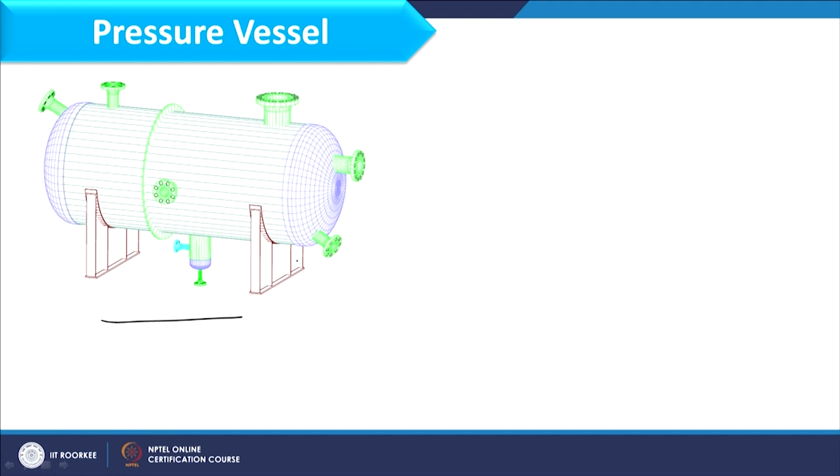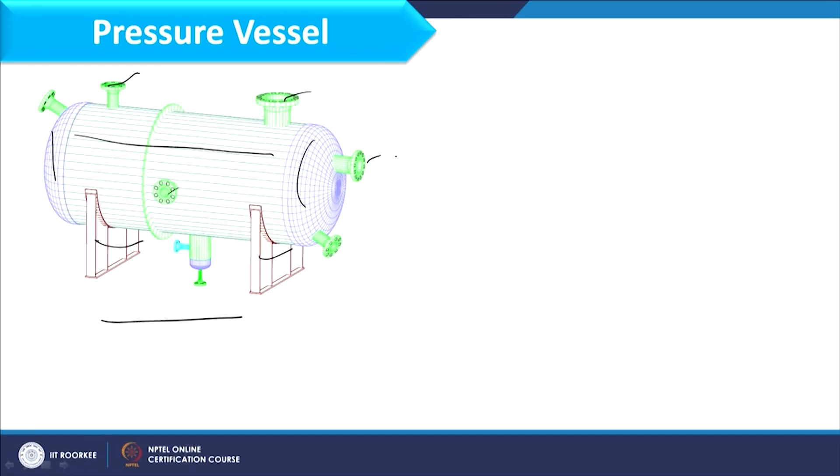Now if you focus on this particular slide, here I am having this pressure vessel which is horizontally placed, and you see this is the shell and these are the heads, and here we have the support and these are inlet outlet nozzles. So it is horizontally placed.

Another schematic I am having is the pressure vessel which is placed vertically, and it has different components which are written over here. So here we will start design from the shell and then we will cover heads and then nozzle, and then compensation, that is related to the opening which is placed in shell as well as head, and then finally we will discuss the support to be placed in this pressure vessel. So here I am having different components.

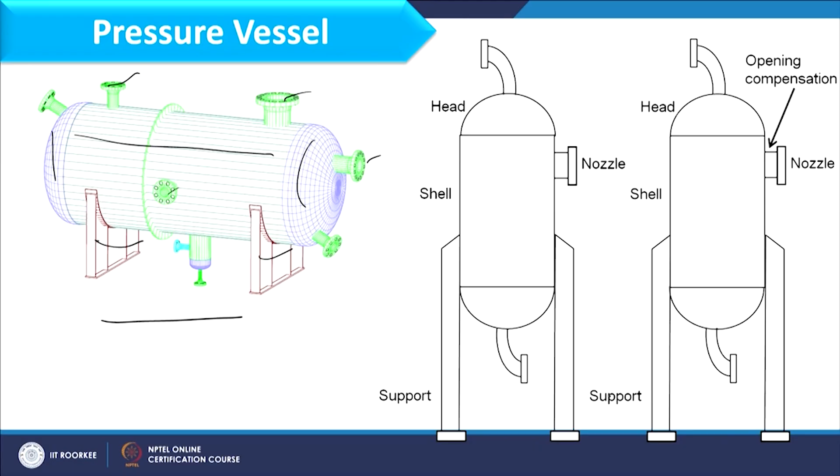So first of all let us start discussion on design of shell, and as far as design of shell is concerned, we will start with design of cylindrical as well as spherical shells. So in most of the practical cases the wall thickness of the process equipment, now you must have the idea that what we are going to compute in designing is the thickness of different components. So here we will speak about design of wall thickness of shell.

So in most of the practical cases wall thickness of the process equipment is not so small that the assumption of uniform stress distribution is justified. Now if you remember the membrane stresses, where we derived expression for computation of thickness for thin vessel, there we considered very small thickness of the metal sheet or of the shell, and that gives the uniform distribution of stress from inner surface to outer surface, because that thickness is very small, and in that case we considered only two stresses, hoop stress as well as longitudinal stress.

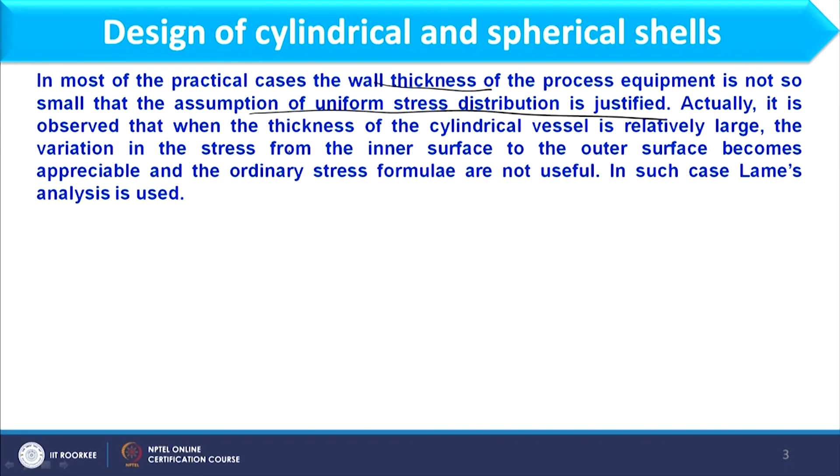However, when I am having thick vessel where thickness is significant, in that case radial stress also matters along with hoop stress as well as longitudinal stress. So when I am having thick walled vessel, whatever expression we have derived for membrane stresses will not be applicable. So to design the thick walled vessel we will use a different analysis, and that analysis is known as Lame's analysis, as it is mentioned over here.

So here I am having the thick walled vessel, where if you consider this is the total thickness of the vessel, and I am considering stress at this point as well as at this point, stress will vary from inner surface to outer surface, and that we need to consider in designing. And the cross sectional image of this cylinder is shown in this figure, where if you see inside this we have the pressure which we call internal pressure. So in this case internal pressure as well as external pressure are both working simultaneously.

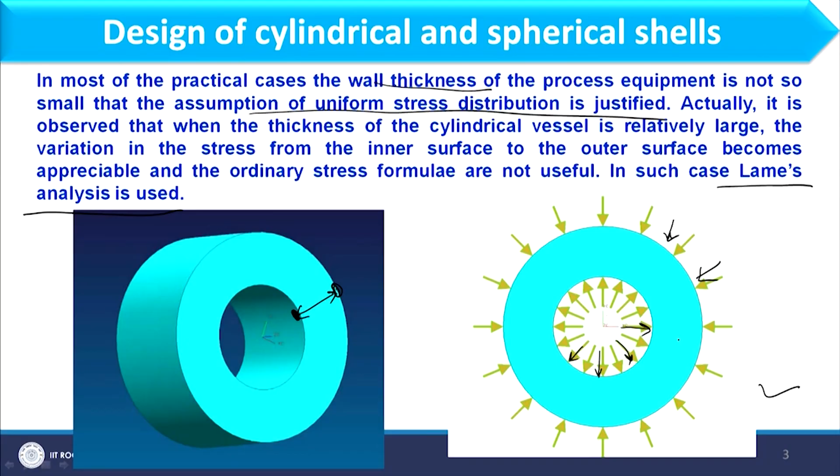As far as derivation is concerned, we will consider the cross sectional image which we have just discussed, and which is also shown over here, where both pressures are acting, internal pressure as well as external pressure. Internal pressure, if you consider in this image, will try to expand this periphery. However, outer pressure or external pressure will try to squeeze this outer periphery. So both pressures are acting, and this condition would be the extreme condition which can ever occur in a pressure vessel design, and therefore we are starting design from this stage only.

Now, to derive the expression for thickness of thick walled vessel, in this image we will consider a small section, and around this small section we will make the balances.

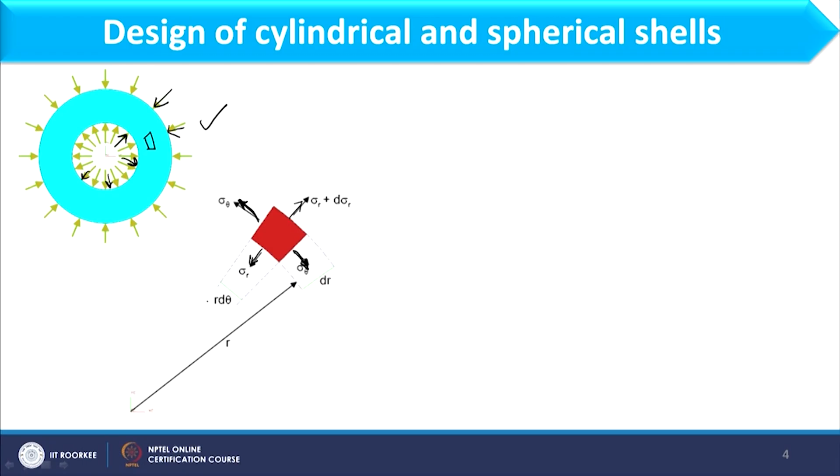So, in this section I have shown over here, if I consider the inner part, the stress is sigma r in the radial direction, and at the outer side we have the stress sigma r plus d sigma r, and this sigma theta as well as this sigma theta will be considered as hoop stress, and this particular section makes an angle with the center, and that will be nothing but d theta.

Okay. And this image we have reproduced over here for better understanding, where sigma r plus d sigma r and all parameters are shown, and here we have the angle del theta, and please consider d instead of del for derivation purposes. So, once I have this d theta, this hoop stress sigma theta is acting in this direction, and when I consider a straight line, this angle must be d theta by 2, and in the similar line the same angle is shown over here.

Now, what happens when I make the force balance? Force in this direction will be balanced by force in this direction. So, in this direction force will be due to sigma r as well as the vertical component of sigma theta, which will also act, as it is shown over here. Let us see, it is sigma theta, so the vertical component of this will be sigma theta sin d theta by 2. Okay. And the same stress will also be applicable in this direction. Okay. So, as far as balancing is concerned, we will consider the force balance.

Now, the force in the upward direction should be sigma r plus d sigma r. If you consider, this is the total stress and this should be the acting area. So, the acting area would be r, because this is the r, okay, and here I have this dr. Okay. So, r plus dr into d theta, that would be this curve, and then L we can consider as unity. So, we have considered 1 as the unit length over here. So, the force over here is sigma r plus d sigma r into r plus dr into d theta into 1.

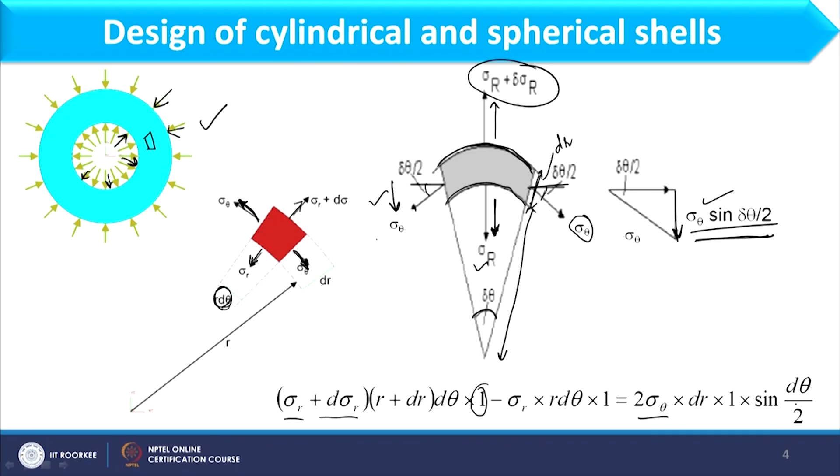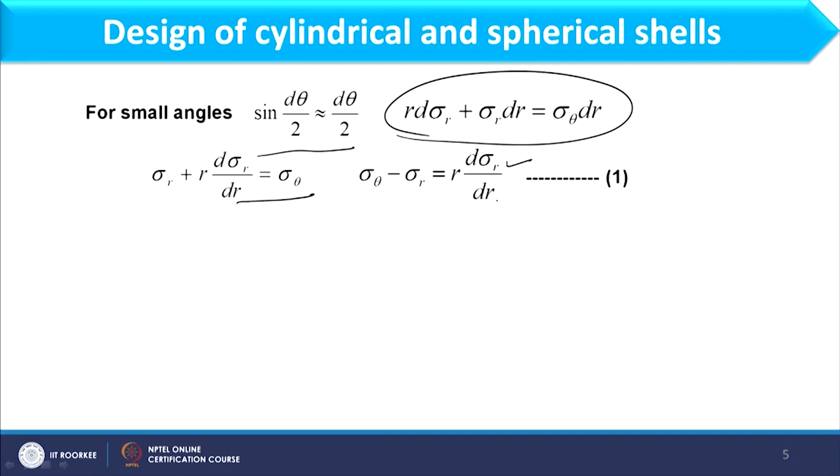For small angles, we can replace sin d theta by 2 with d theta by 2. So, considering this d theta by 2 and resolving the previous equation, we can get r d sigma r plus sigma r dr equal to sigma theta dr. So, this would be the equation after resolving the previous equation. Again we can rearrange this in this form, and then further we can rearrange this as sigma theta minus sigma r equal to r d sigma r by d r. So, that I will consider as equation 1.

Now what happens when I consider stress in the longitudinal direction? That stress would be uniform throughout, because whatever thickness is there in the longitudinal direction, the stress throughout the thickness will be uniform, and therefore because stress is uniform, we can consider strain should also be uniform.

Now if you remember the expression of the triaxial system which we discussed in lecture 2 of week 1, that expression we will use over here to define the stress and strain relationship in this system, and that equation is given as mentioned over here, where epsilon L is equal to 1 by E into sigma L minus mu times sigma r plus sigma theta, and that will be equal to a constant.

Now as we have discussed, the longitudinal stress will be constant, and accordingly the strain in that direction will also be constant. So in this equation if you see, epsilon L is constant, E is constant, sigma L is constant and mu is constant. So the only variable I have is sigma r plus sigma theta. Okay. So further I can rearrange this in this form, sigma r plus sigma theta equal to a constant, and that we can equate to 2a for derivation purposes, and this I have mentioned as equation 2.

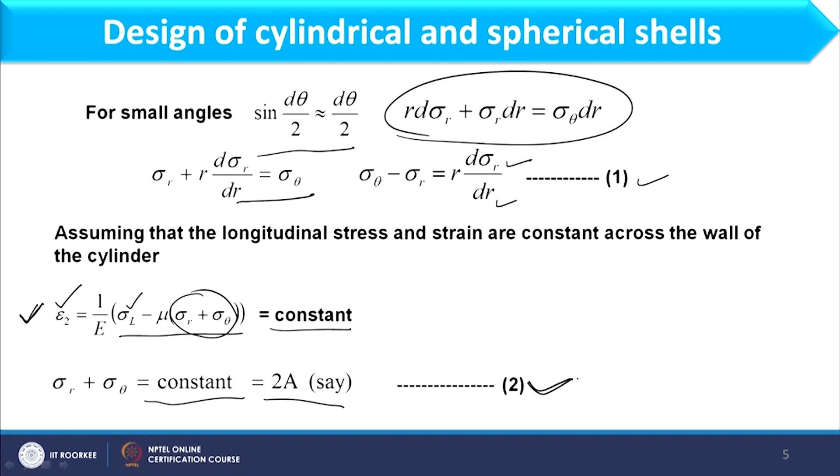So here I am having equation 1 as well as equation 2. Now substituting sigma theta in equation 1, we can remove one of the variables from equation 1 as well as equation 2. After substituting we can have an expression like this, and when we multiply both sides of this equation by r and rearrange, we can have this equation where sigma r and sigma r are added. So 2 sigma r plus r squared d sigma r by dr minus 2 a r equal to 0.

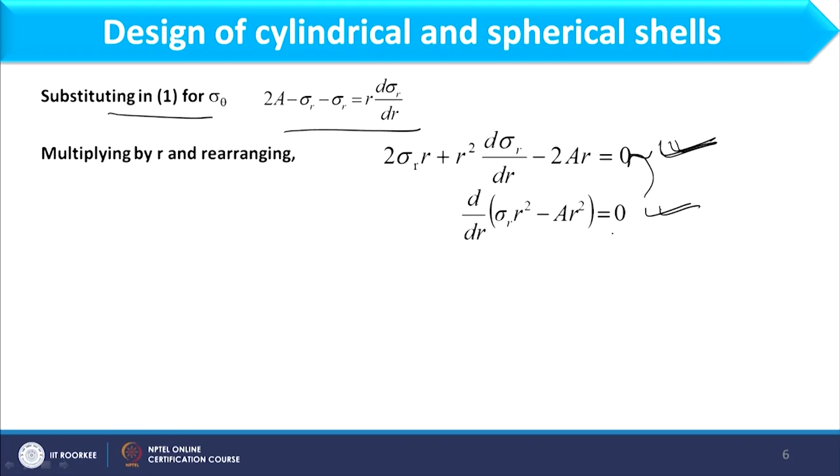Now what does this equation show? Further, if I consider this equation in this form, where d by dr of sigma r square minus a r square should be equal to 0, and if I derive this, I will get this equation. So here I am having the equation in derivative form, and then we will integrate this derivative expression, and we can find that sigma r square minus a r square should be equal to a constant, which I have replaced with minus b for derivation purposes.

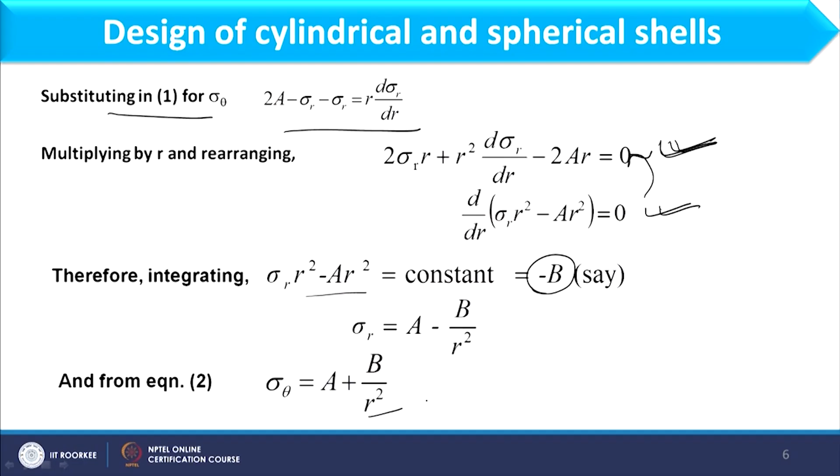So here I am having sigma r, we can extract sigma r from this equation and rewrite it like this, and here I am having another equation for sigma theta, which is equal to a plus b by r square. These two equations are basically called Lame's equations. For further analysis we will use these Lame's equations, and here I am having two constants, a as well as b. Now putting the conditions of the actual system, we can derive the expressions of a as well as b.

Now what would be the conditions? If you consider the cross sectional image of the thick walled vessel where internal and external pressures are both acting, that would be the object for which we need to derive the equation. So we will extract conditions from that image only, where if r equal to ri, sigma r would be minus pi. Now why is it minus pi? Because the direction of sigma r and the pressure are opposite to each other. Further, when r equal to r naught, sigma r will be equal to minus p o, that is the external pressure.

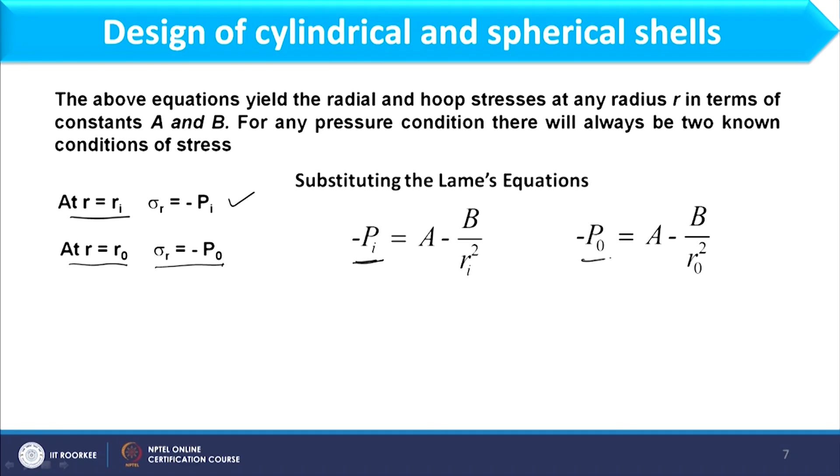So putting these conditions in Lame's equation, we can write the equations for internal pressure as well as external pressure like this, and further we can resolve these equations to find the expressions for b as well as a, as mentioned over here. These a and b expressions I will further use in the equations which we have considered as Lame's equations, and then we will go for the final expressions. So let us do that. Putting a and b in Lame's equation, I can find the expressions for sigma r as well as sigma theta. These two equations we can derive by putting the values of a and b.

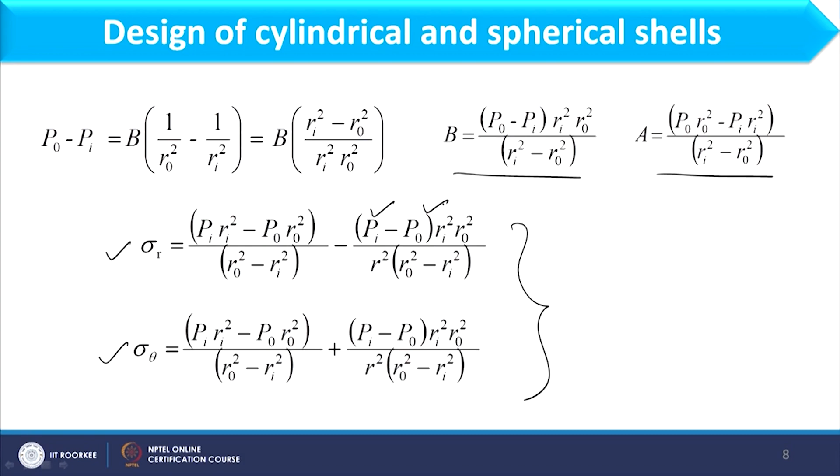Now, if you consider these two equations, both internal as well as external pressures are acting simultaneously. However, when we operate the system, it may be internal pressure operation or external pressure operation, but here we will derive the expressions for the internal pressure condition. So, when I am considering the internal pressure condition, it means the external pressure would be 0. So, in that case Po will be 0, and we put Po equal to 0 in this equation and then further resolve it. Putting Po equal to 0 and Pi equal to P, we can have expressions for sigma r as well as sigma theta.

Now, if I focus on these two, here I have only one pressure, that is internal pressure, and the variable is r in both cases. Now, if you consider the expressions for sigma r as well as sigma theta, which will give the maximum possible value? Obviously, when we compare these two expressions, sigma theta will give the maximum possible value, and that value would be maximum when r is equal to Ri.

I hope you are getting it. Here I have to maximize the stress which can be generated in the system. So, sigma theta would be maximum when r equal to Ri, and that would be the maximum possible stress in the system, and that stress we can replace with the allowable stress value, because at that value we will design the system.

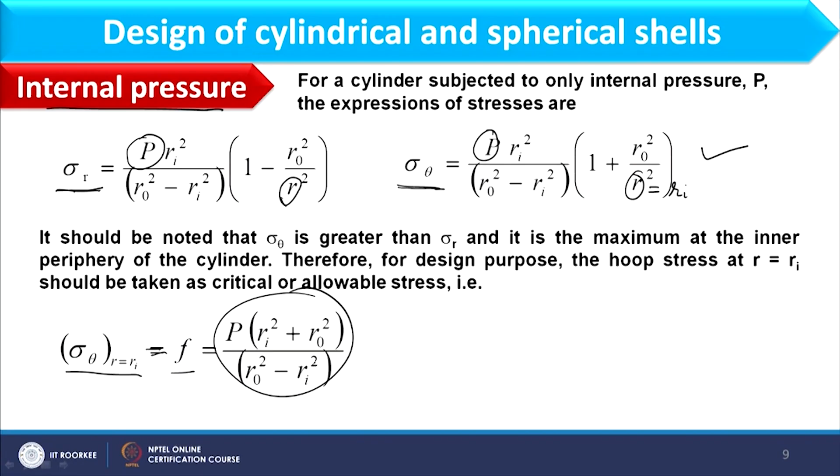So, sigma theta at r equal to Ri, that we can replace with F, and that would be equal to P (Ri square plus Ro square) divided by (Ro square minus Ri square). This expression we have obtained by placing r equal to Ri, and that we can equate to allowable stress. And what is allowable stress? That we have discussed in terminology in lecture 4 of week 1.

And further, in the terminology lecture, we discussed another term, which is the weld joint efficiency factor. When we make any welding joint in a metal sheet, the strength of that joint will be weaker in comparison to the regular sheet. Therefore, the allowable stress that we have considered for regular material must be multiplied by the J factor to get the actual stress.

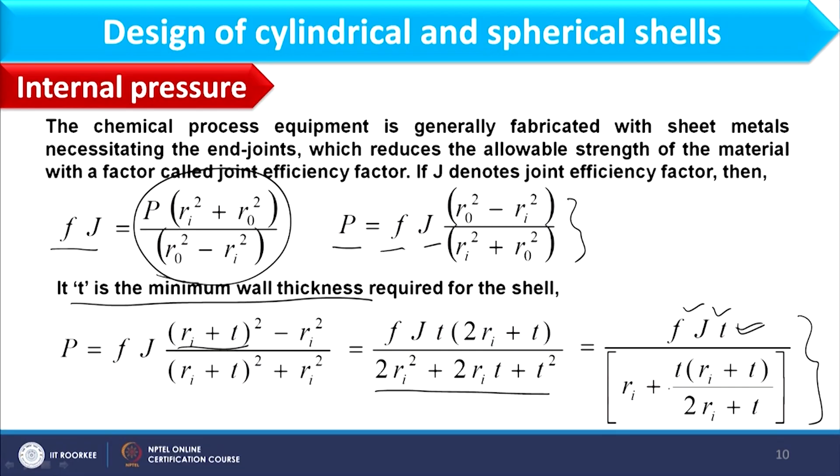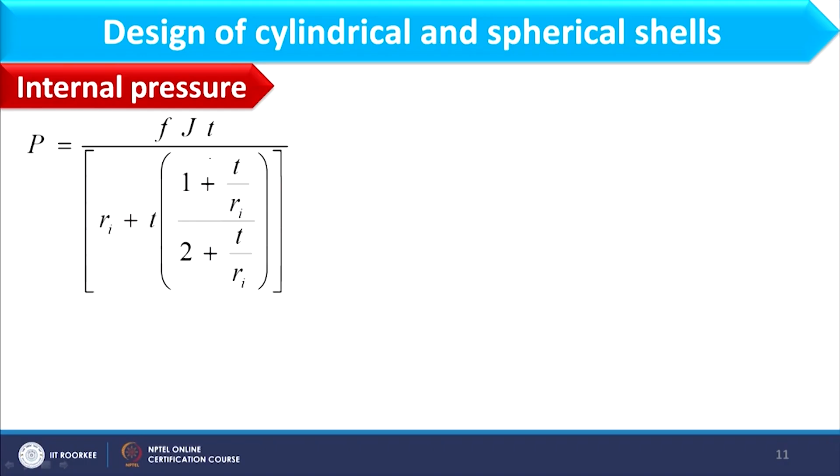So, if I consider t is the minimum wall thickness required for the shell, Ro we can replace with Ri plus t, and the whole expression we can rewrite and rearrange, and then further resolving it we get an equation where P is defined in terms of F, J, t and radius. So, P will be equal to FJt divided by this whole expression. This would be the basic equation for design of shell when internal pressure is acting, and this equation is also used as a basic equation in the code, which is IS 2825.

Further representing this equation in terms of diameter instead of radius, we can have an equation like this, where P in terms of diameter is shown. Now, as we have discussed, this equation will be used as a base for design of shell when internal pressure is acting. So, here we will apply the limitation of IS 2825, and if you remember, there is the limitation where do by di should be less than or equal to 1.5.

So, this is the expression for do by di less than 1.5. After resolving this, we can have the expression of t by di equal to 0.25. How has this 0.25 come? Because this do we have replaced with di plus 2t, and after resolving it we get t by di as 0.25. Now, what happens when we put this t by di as 0.25, this whole expression will become 1.2, and that would be the maximum possible value.

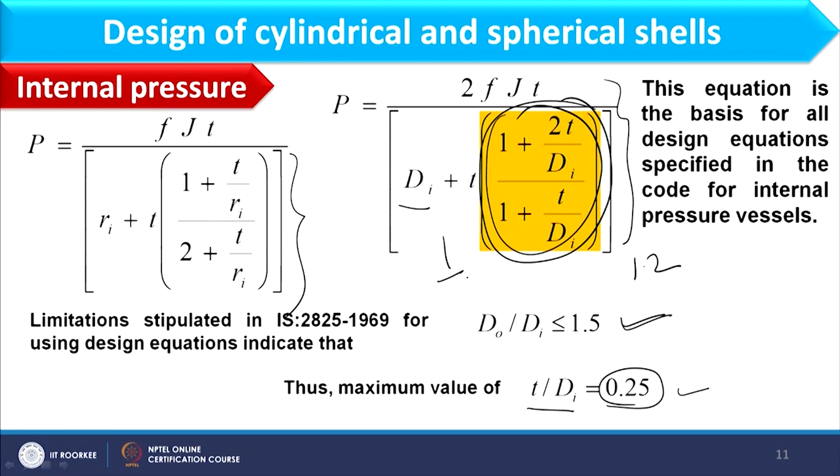If I am considering the minimum value of t by di, that value would be 0, and if I put 0 over here, the whole expression will give the value as 1. So, this whole expression varies from 1 to 1.2. For derivation purposes, we have considered this expression as 1, because 0.25 would be the maximum possible value which should not exceed. Therefore, instead of 1.2, we have taken the value of this expression as 1.

So, this would be the final equation for pressure, where P is the internal pressure and P equals 2FJt divided by (do minus t), because here the whole expression I have replaced with 1. From this we can extract the term t, which is the minimum thickness, that should be equal to P di divided by (2FJ minus P), and further it can be written as P do divided by (2FJ plus P). So, when I am considering outer diameter, I have to take plus over here. When I am considering inner diameter, I need to take minus over here.

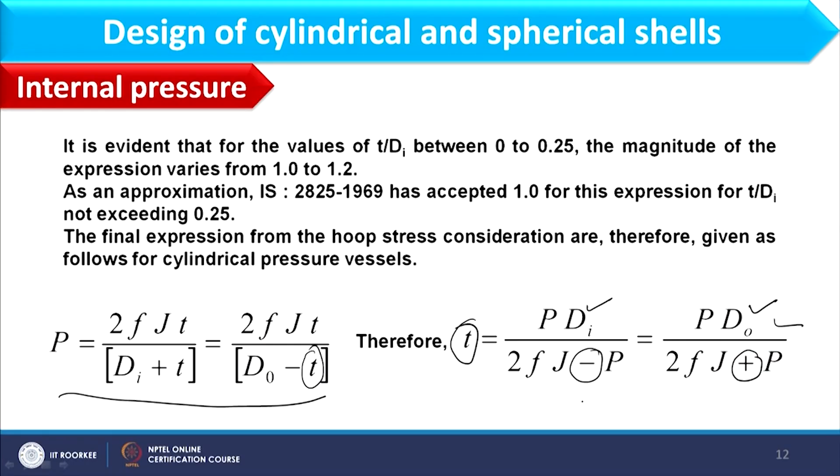So, this expression is basically the minimum thickness of the vessel. Why am I calling this a minimum thickness? Because at least this thickness should be provided to withstand the pressure P. Therefore, it is called minimum thickness.

So, here I have the expression for internal pressure in a cylindrical shell, and as per IS 2825 1969, the expression given is P is equal to 200 FJT divided by D naught minus T. If I need to extract T from here, the expression should be T equals P D naught divided by 200 FJ plus P.

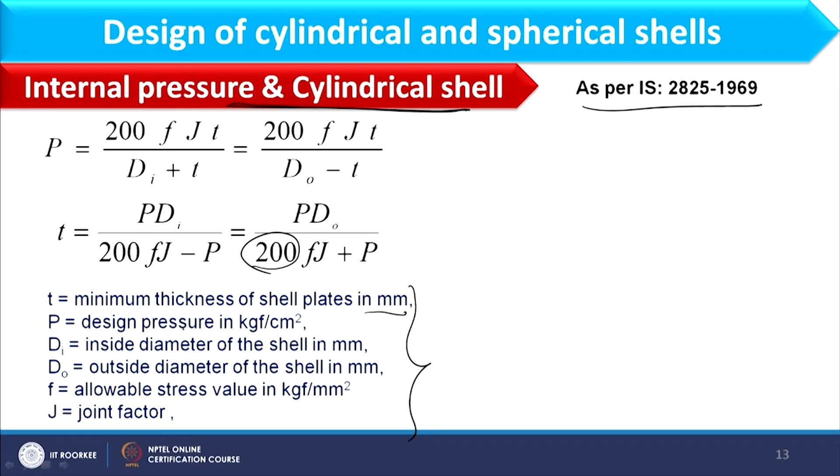Now, how has this 200 come? When you see the nomenclature, here T is in mm and P is the design pressure in kg force per centimeter square, and allowable stress, that is the F value, is given in kg force per mm square. Due to this difference in units, we have this 200 factor, and J is the joint efficiency factor, which we discussed in lecture 4. So, these expressions are given in IS 2825 1969.

However, in books you can find the expression 2 Fj instead of 200 Fj, because their pressure as well as allowable stress are both shown in the same unit, that is Newton per meter square, and thickness we can compute in meters. So, due to this difference in units, we can have different expressions in code and in books, and the difference is only in the factor, where in the code 200 is available and in books 2 is available.

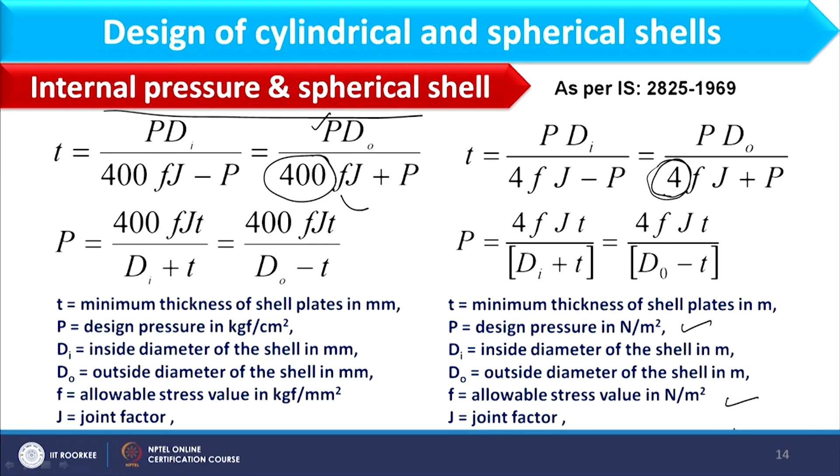And we have already discussed that this T is the minimum possible thickness which should be provided to withstand pressure P. That thickness is the minimum possible thickness that will be maintained throughout the operation of the vessel. Now, if you remember the terminology lecture, which is lecture 4 of week 1, there we discussed another parameter which is corrosion allowance. Corrosion allowance is used because there are many ways through which deposition occurs or material is extracted from the metal sheet, and all that wastage occurs. So, to account for that we will have corrosion allowance.

So, that corrosion allowance will be added to the minimum possible thickness, because as time passes only that layer, the thickness which we have provided as corrosion allowance, would be affected. The rest of the thickness will remain as it is to carry out the process in a regular manner. So, minimum thickness plus corrosion allowance we will add to get the thickness of the vessel.

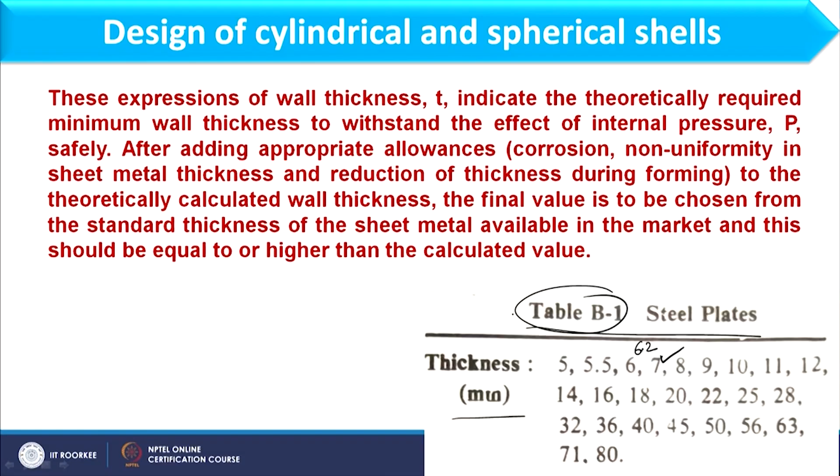Now, what happens after that? There are sheets available in the market which have standard thickness. So, whatever thickness is available above T plus corrosion allowance, that we will consider as the standard thickness, and you can see that value from table B1, which gives standard thickness of steel plates. So, let us say I have the value 6.2 for minimum thickness plus corrosion allowance. I will consider 7 as the standard thickness. This table B1 is available in the book by BC Bhattacharya, and you can refer to appendix B in that book. So, in that way we will calculate.

Now, in this slide we will discuss internal pressure failure. How that internal pressure failure will occur can be understood as the vessel failing after stresses in part or a large portion exceed the material strength. Whatever stresses are generated, if they exceed the strength of the material, then failure will occur.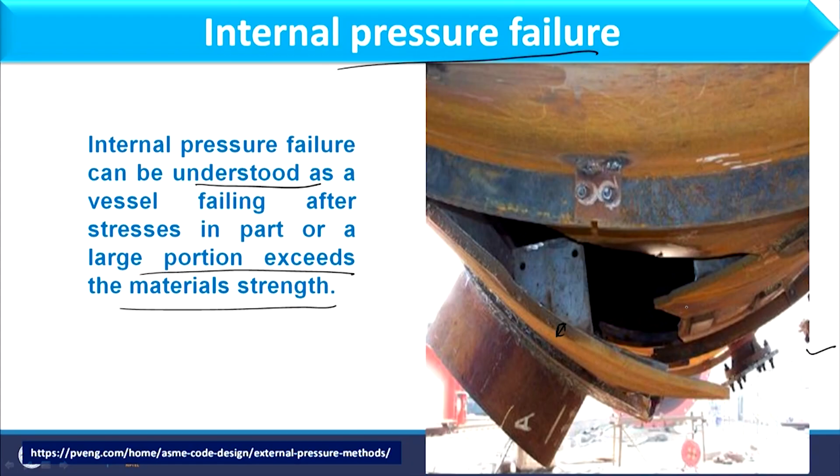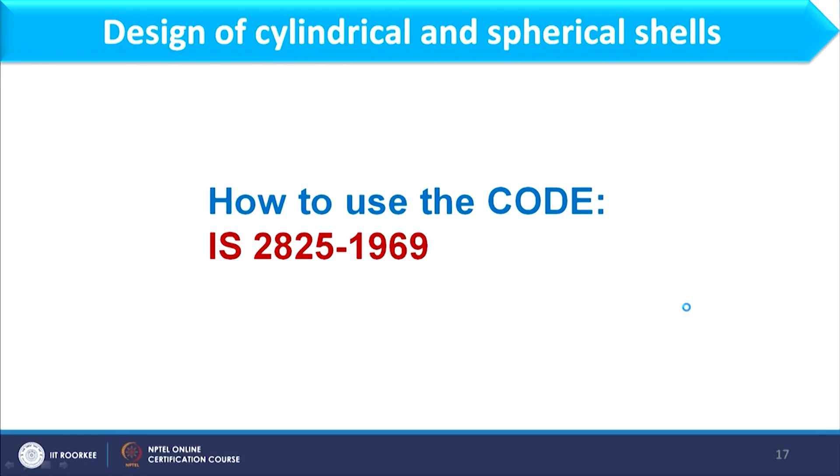Now, till now we have derived the expression for thickness of cylindrical as well as spherical pressure vessel, and considering that we will solve a few examples. But before that I want to demonstrate how code IS 2825/1969 will be used, and I assume that this code will not be available to you. So, that code I will provide to you so that you can use it. But now we will discuss how it should be used.

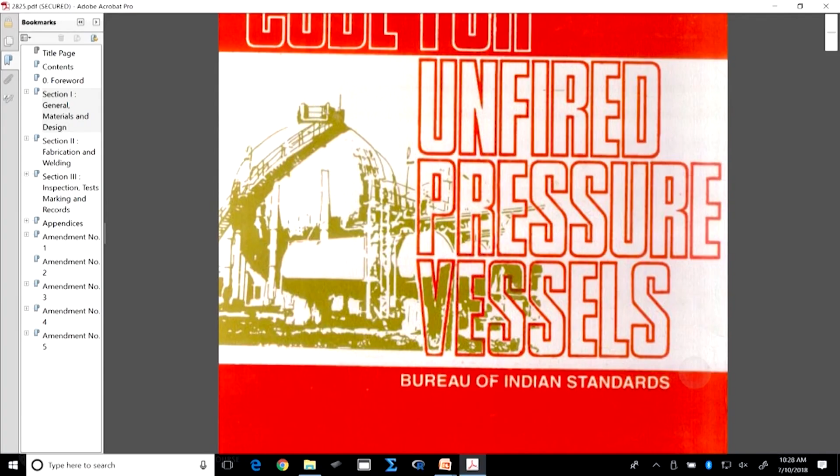So, if you see here, this is basically the code IS 2825, which is the code for unfired pressure vessels, and which is given by the Bureau of Indian Standards, as we have discussed that these standards are given by governmental bodies. So, in India, that is the Bureau of Indian Standards. So, this is basically the code where we have IS 2825/1969.

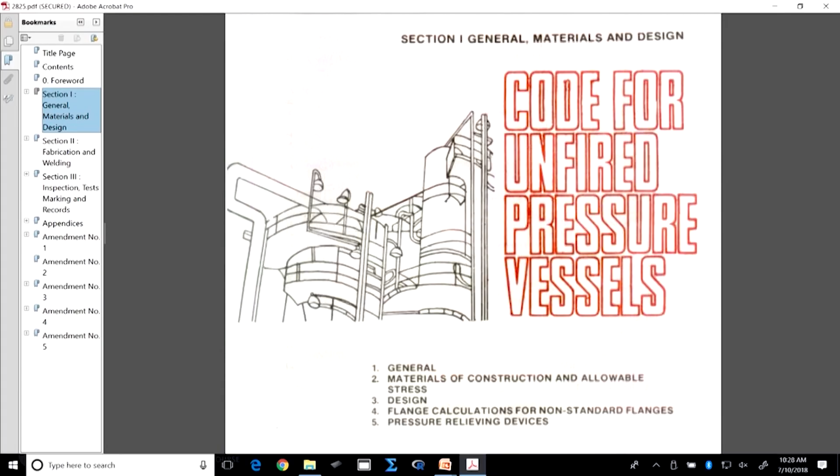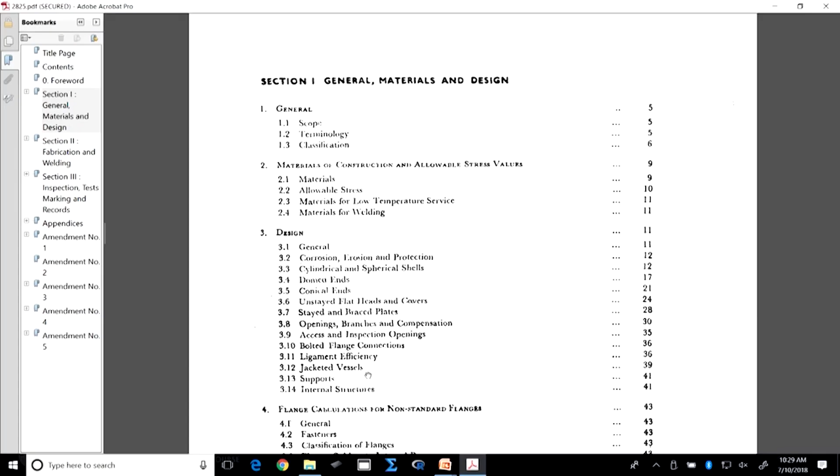If you see the content of this code, here I have section 1, section 2 and section 3, and as far as this particular course is concerned, we will only focus on section 1, which is on generals, materials and design. For design, section 1 should be considered. Therefore, we are focusing on this only, where designs are given for cylindrical as well as spherical shells, and then we have different sections that we will discuss when time comes.

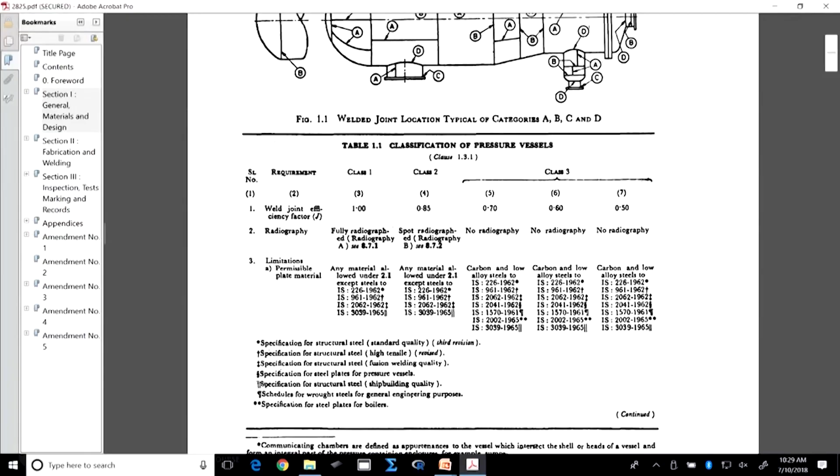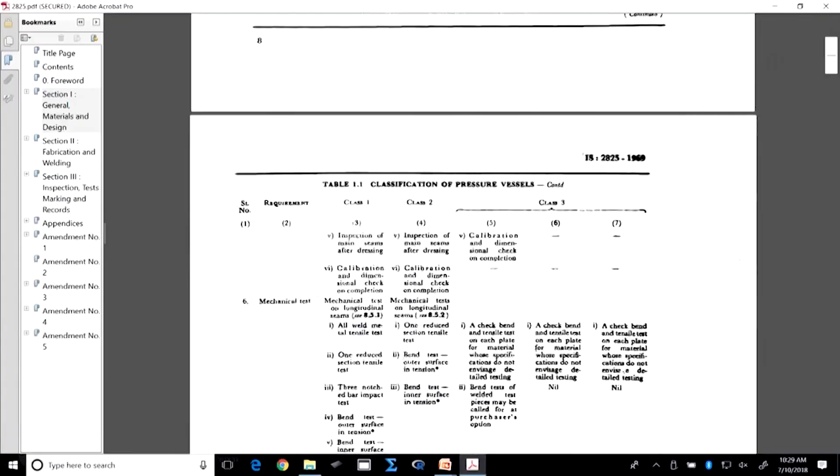Here some of the values of j are defined, and if you remember this particular diagram, we have already discussed it in lecture 4, and here we have table 1.1, which we also discussed in lecture 4. So, in this way you can use this. There are so many parameters which are given over here.

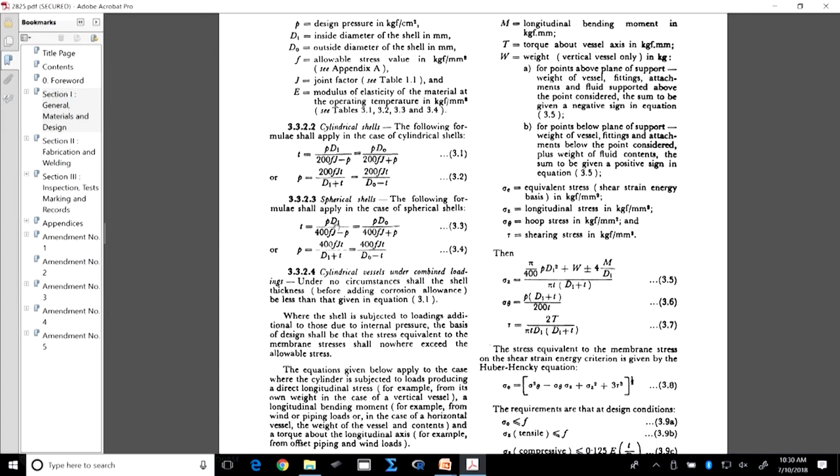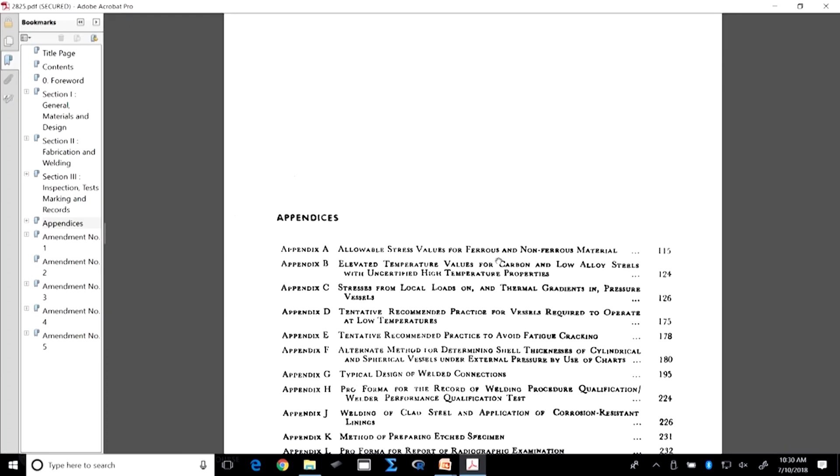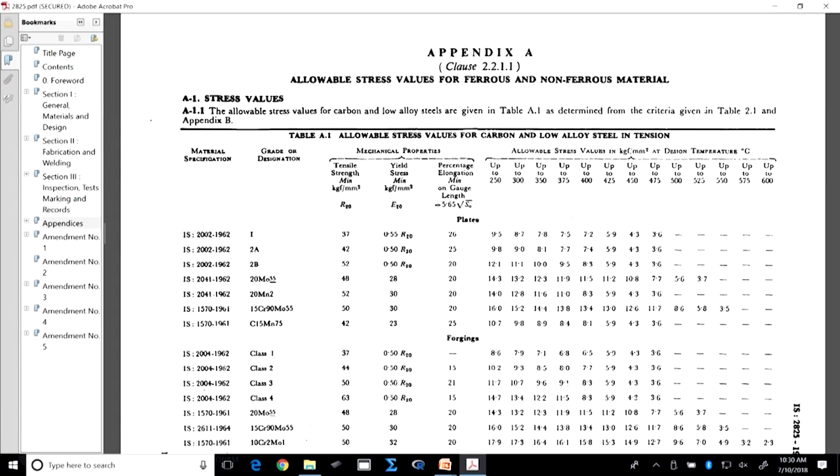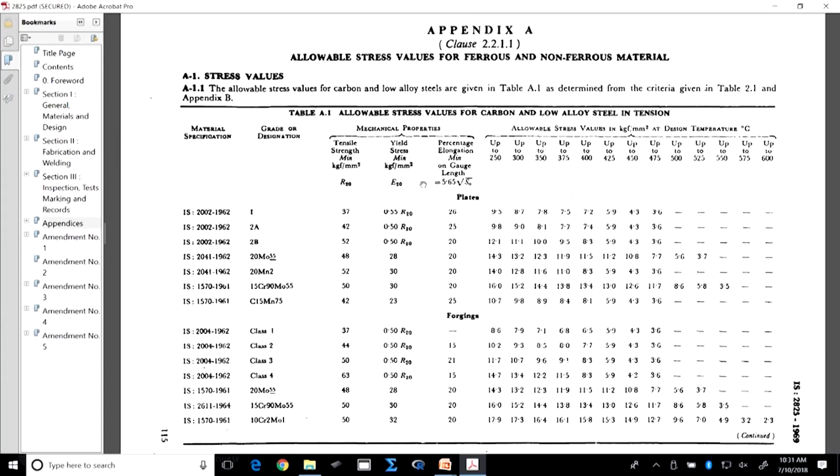Here I have appendices. When we see these appendices, appendix A will be on allowable stress values for ferrous and non-ferrous materials, and a screenshot of that I have also shown in lecture 4 while discussing allowable stress. I think you can recognize this table from there. There we have shown different materials and allowable stress, and along with this we have mechanical properties of that particular material also in this table. So, in this way you can use different values in the expression of thickness.

Now, we will solve a few examples to demonstrate how the thickness of cylindrical as well as spherical vessels will be computed. So, let us focus on example 1, where a process vessel is to be designed for maximum operating pressure absolute. You see here absolute is given, which is 501 kilonewton per meter square. An understanding between purchaser and manufacturer indicates that the vessel should be overdesigned, considering 6% extra to maximum working pressure. So, here usually we consider 5% extra, but here as it is required by the customer, 6% extra is required. So, we will design accordingly.

So, the vessel has an outer diameter of 1.5 meter. It is made of the material IS 2002-1962 grade 2A, and its design temperature is 435. Corrosion allowance of 2 mm is given. Now, here we need to design the vessel for class 1 or class 2 of the Indian standard specification, where a single welded butt joint with backing strip is used. So, this information is given to extract the value of j for class 1 as well as for class 2. What we need to find is the standard plate thicknesses to fabricate the vessel for cylindrical as well as spherical vessels.

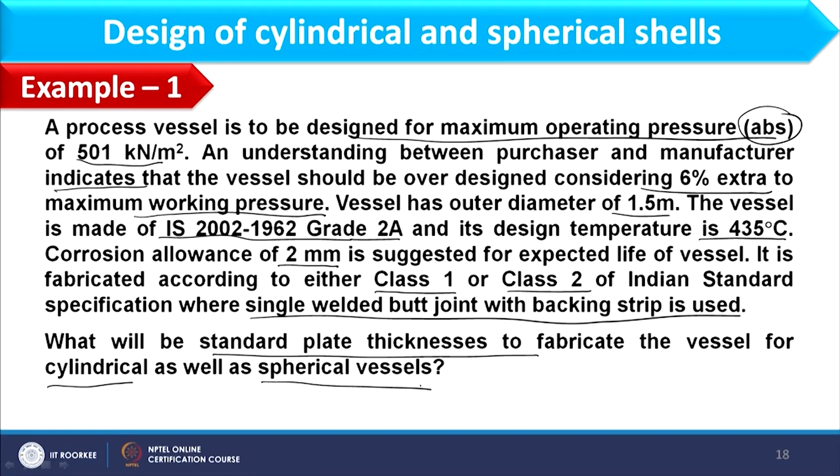So, let us focus on the solution of this. In this example, we are given a maximum working pressure in absolute. However, if you see in the expression of t, we consider pressure in gauge. Now, why are we considering gauge? Because when we have equated external pressure to 0, what is the meaning of that?

It means that when external pressure is 0, it means external pressure is 0 in gauge. In that case, outer pressure should always be atmospheric pressure, and internal pressure would be higher than that. So, when I am considering P naught equal to 0, it means that I have accounted in gauge. So, whatever P I have considered, that should also be taken in gauge. Therefore, in the expression of T, whatever pressures are given, those should be taken in gauge.

So, here the maximum operating pressure in absolute is given as 501. First of all we will convert this into gauge by deducting atmospheric pressure from the absolute. So, here we have 501 minus 101.325. So, 399.675 kilonewton per meter square is the maximum working gauge pressure, internal.

Design pressure should be computed as 6% extra. So, 1.06 into 399.675, and that should be equal to 423.6555 kilonewton per meter square, and we need to convert that into kg force per centimeter square, because in this unit it will be used in an expression provided in the code. So, that value comes as 4.32 kg force per centimeter square.

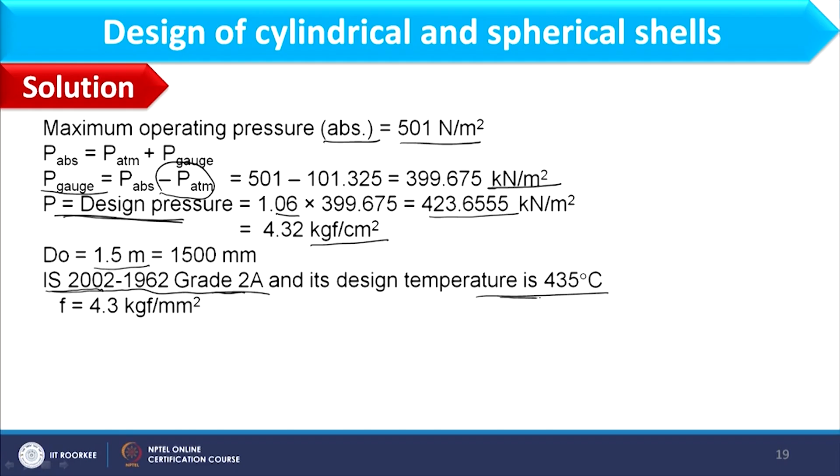Outer diameter is given as 1.5, and the material I have been given is IS 2002-1962 grade 2A, and its design temperature should be 435. This information is provided to extract the value of allowable stress. So, let us see the table of allowable stress. Here I have the table of allowable stress, and IS 2002-1962 grade 2A, this is the material, and 435 is the design temperature. You see here, up to 450 we can use the value 4.3 kg force per mm square. Therefore, F I have taken as 4.3 kg force per mm square.

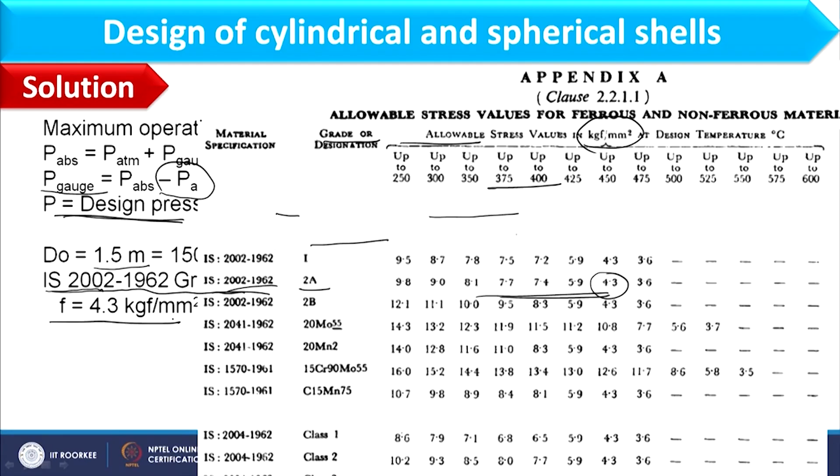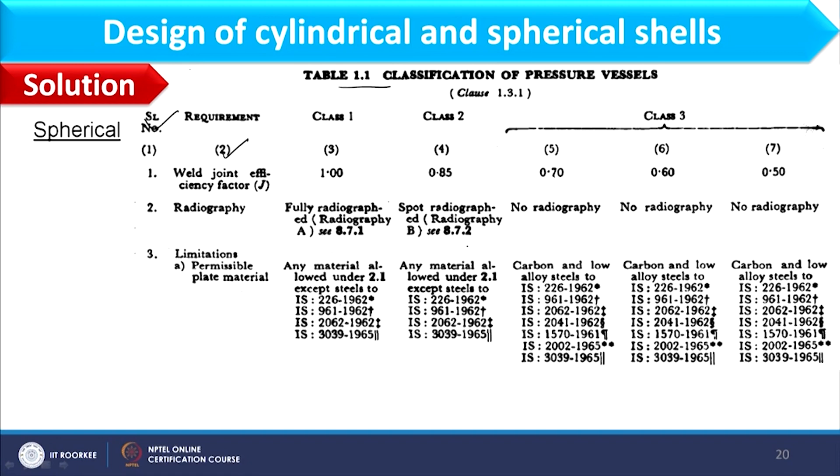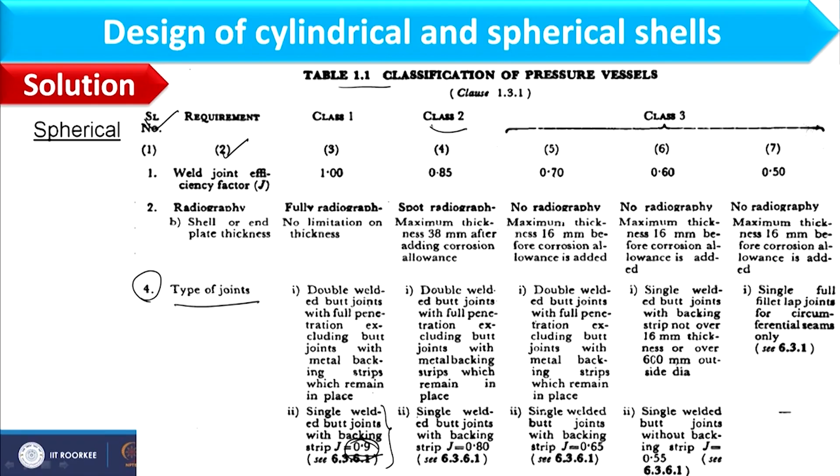Now, here we are designing a spherical vessel where for class 1 we have to extract the value of J from table 1.1 from the code. So, let us focus on this. Here I have table 1.1 where joint efficiency factors are already mentioned, but we need to find the one corresponding to a single welded butt joint with backing strip. When we further see this table, in the second page we have point 4 where the types of joints are mentioned, and here you see for class 1 single welded butt joint with backing strip is there, and J I can take as 0.9. And similarly for class 2 we can have the value of J as 0.8.

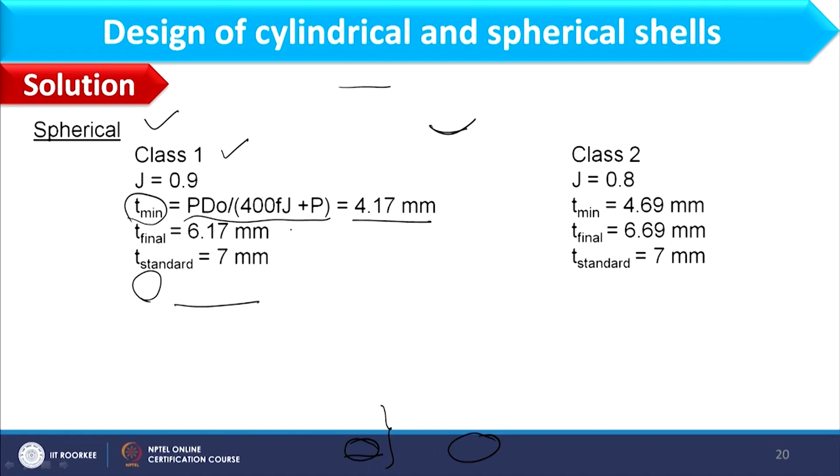Considering the values of J, allowable stress, pressure and outer diameter, we can find out the minimum thickness using this expression, and it comes as 4.17, that is the minimum possible thickness. We will add corrosion allowance to this, and that should be equal to 6.17. Now, once I have the value 6.17, the next value available in table B1 is 7. So, 7 I can take as the standard thickness. In a similar line for class 2, minimum thickness is observed as 4.69. Adding corrosion allowance we have 6.69, and further 7 we can take as the standard thickness of a spherical vessel for class 2.

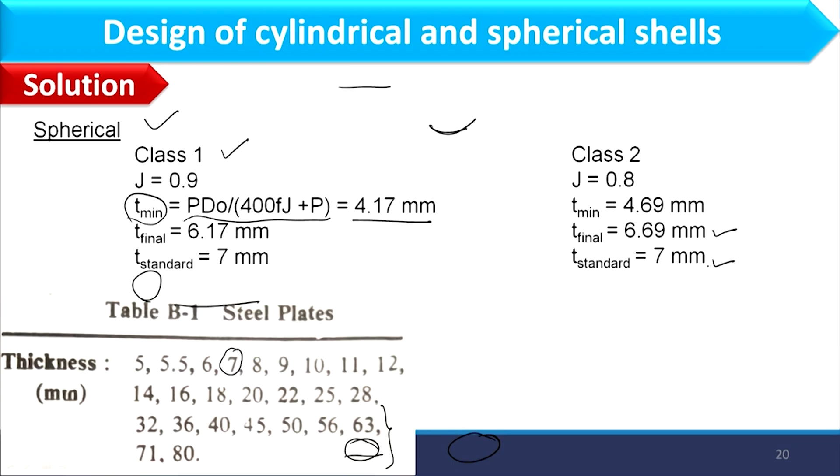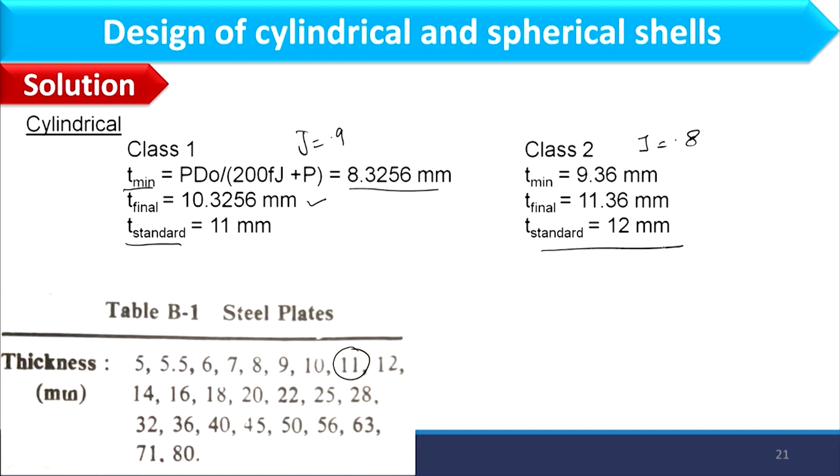And similarly for a cylindrical vessel for class 1, the J value will remain 0.9 in this case and 0.8 in this case for class 2. So, for class 1 we have minimum thickness as 8.3256, adding corrosion allowance we have 10.3256, and then T standard I can take as 11 as it is the next value, and similarly for class 2 I can find the standard thickness as 12 mm. So, in this way we can calculate the thickness of cylindrical as well as spherical vessel. Minimum thickness, thickness with corrosion allowance and standard thickness, these three thicknesses we need to find for any system.

And further we will discuss example 2 for better understanding, and in this example the manufacturer has 4 different materials to construct the pressure vessel having 2 meter diameter and 4 meter length. As diameter and length are defined, we can consider this as a cylindrical shell. Materials are IS 2002-1962 grade 2B, this is another material, this is another material, and the fourth material is this. So, all these 4 materials are used to construct the pressure vessel. The maximum operating pressure absolute and design temperature are given as 450 kilonewton per meter square and 475 degree Celsius. Corrosion allowance of 3 mm is considered.

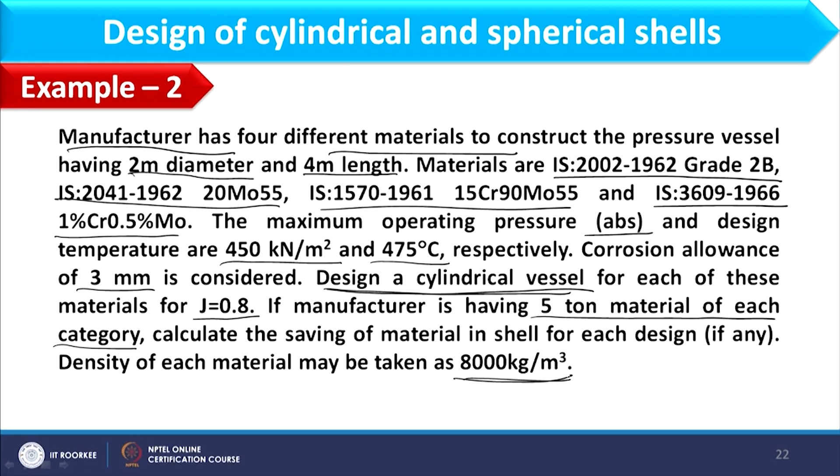In this problem we need to design a cylindrical vessel where the J factor is given as 0.8, and if the manufacturer has 5 ton material of each category, calculate the saving of material in the shell for each design. Density for each material we have considered as constant, and that is 8000 kg per meter cube. So, in that case what we need to find is the saving in each material.

How can I find that saving? Once I calculate the minimum thickness, thickness with corrosion allowance and standard thickness, considering that standard thickness, we will calculate how much material is used to prepare the shell, and then that material will be compared with 5 ton, which is given in the problem for each category of the material. So, let us start the solution of this problem.

So, here maximum operating pressure 450 is given. We will first convert that into gauge, and then we can consider 5% extra. Why 5% extra? Because here I do not have any guideline from the customer. So, I will take at least 5% extra pressure as design pressure. So, here design pressure comes as this.

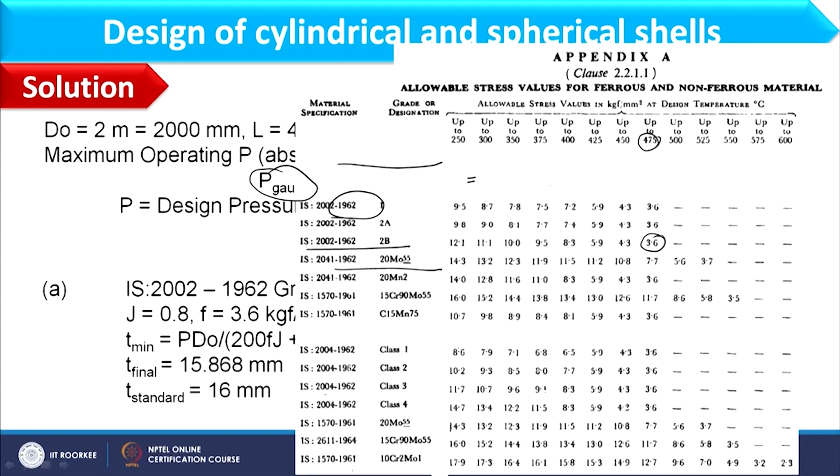Now, IS 2002-1962 grade 2B is the material. And here in the allowable stress table, if you see, this is the material where 475 is the design temperature. So, corresponding to this, 3.6 kg force per mm square can be taken as allowable stress. So, that is given over here. Considering this expression, we can find minimum thickness.

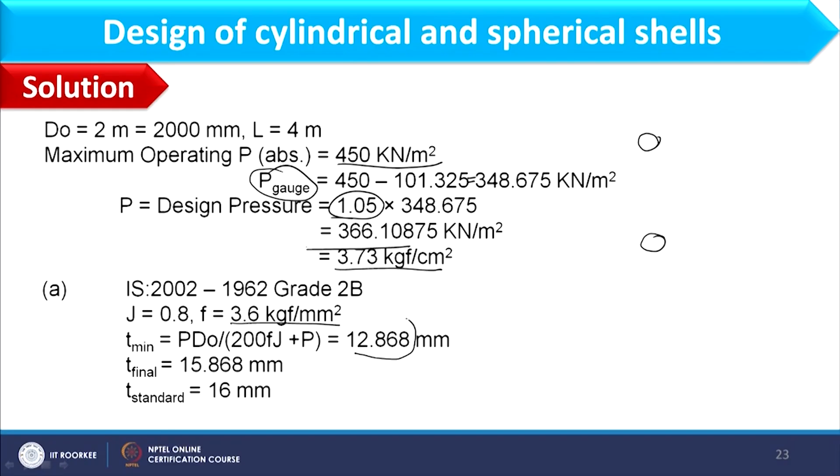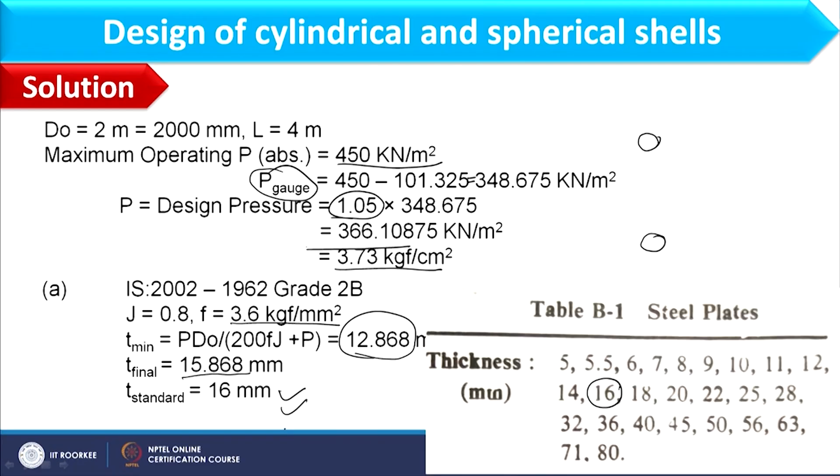J factor I already know as 0.8, other parameters we have already extracted from table or formulae, and then adding 3 mm to this as corrosion allowance, we have thickness 15.868, and then you can see table B1 where the next value is available as 16. So, 16 mm we have considered as a standard thickness. In a similar line, we can compute the thickness for the other materials.

And here you see the material is IS 2041-1962, 20 molybdenum 55. So, this is the material, and corresponding to 475, 7.7 is the value which we have considered over here. And similarly IS 1570-1961, 15 chromium, 90 molybdenum 55. So, this is the material, and the corresponding allowable stress value is 11.7 at 475 degrees Celsius. So, that we have taken here like this, and then we can compute the standard thickness. For this material we have 10 mm as a standard thickness, and for this material we have 7 mm as a standard thickness.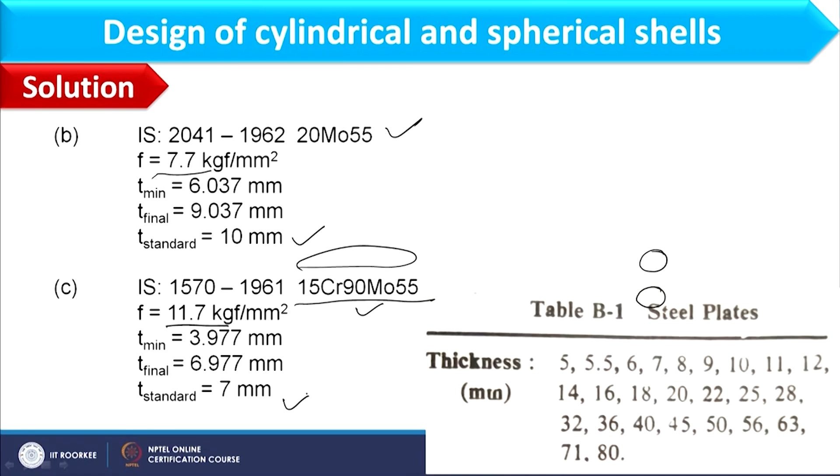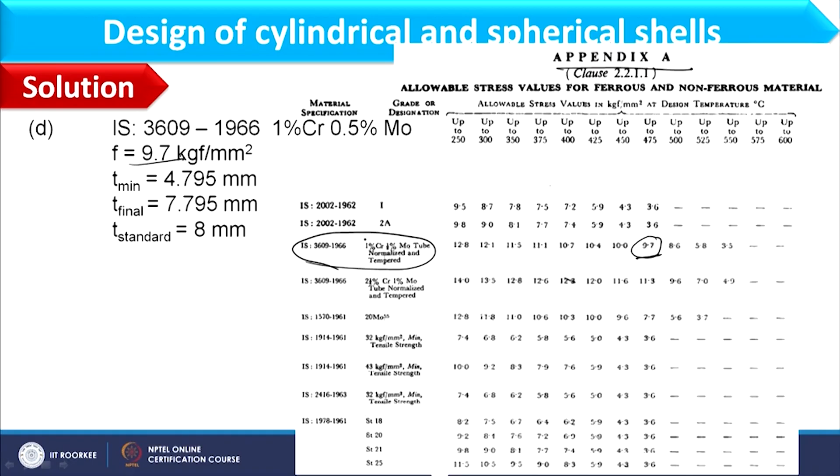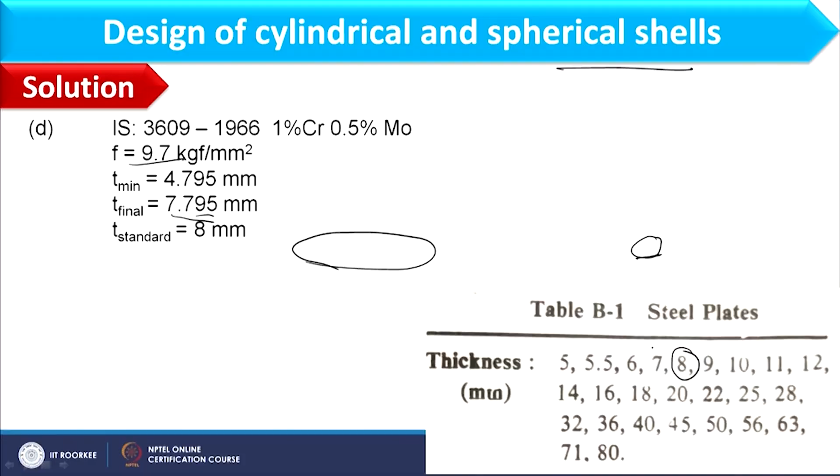And similarly we can compute for material D, where this material, that is IS 3609-1966, 1% chromium, 0.5% molybdenum, is available in the next page of this table. So, here you can find this material, and corresponding to 475 we have F value as 9.7. So, considering this, we can compute the thickness for the material, and it is coming as 8 mm because 7.795 is the thickness after adding corrosion allowance, and the next value to this is 8 mm. In this way we have computed the thickness of all 4 materials.

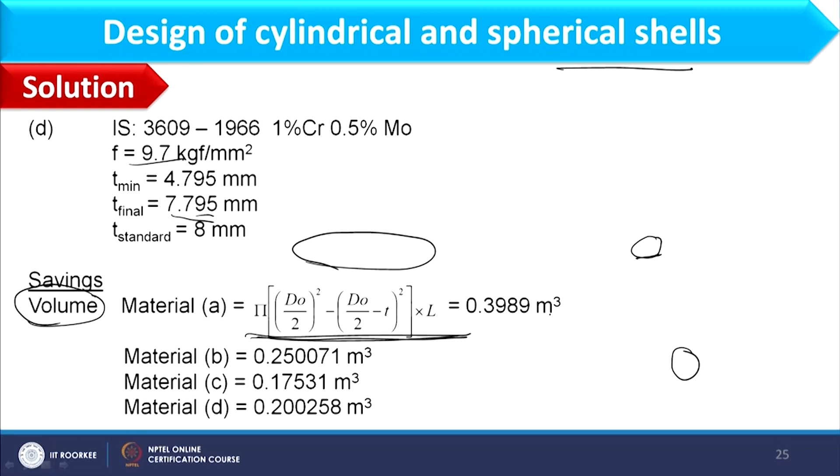Now we will speak about the savings. How can I find the saving? I need to find out the volume of material of each category which is used to design the shell, and then we will multiply that with the density, and then we will compare that with the 5 ton material available. So, for saving we need to calculate the volume, which you can calculate by this common expression, and for material A we have 0.3989 meter cube as a volume, and similarly we can consider volume for other materials also.

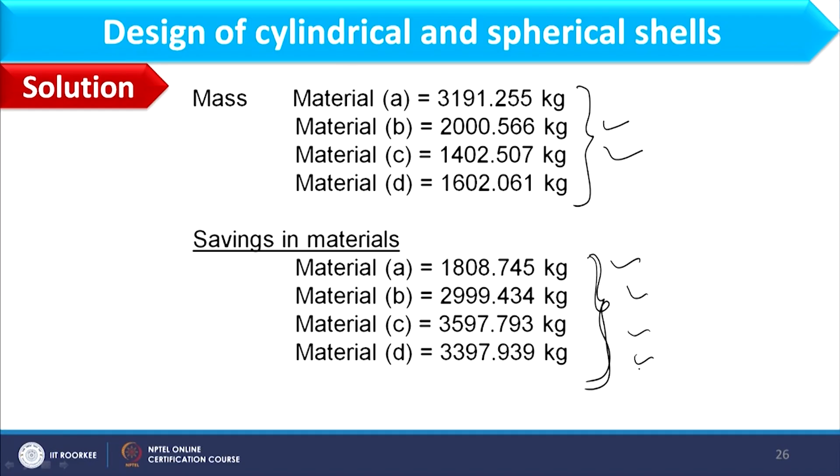Multiplying that volume with the density, we can find the mass of each material as these are shown over here, and when we compare these with 5 ton, we can find out that all materials are below 5 ton. So, we can have savings in each material in these magnitudes as it is shown over here. So, in this way we can find out the savings in the material which is used to design the shell.

Okay. So, here we have discussed 2 examples, and here we have the reference books. This you can use for your study purpose, and IS 2825, how it will be used, that we have already demonstrated, and you can follow other books also.

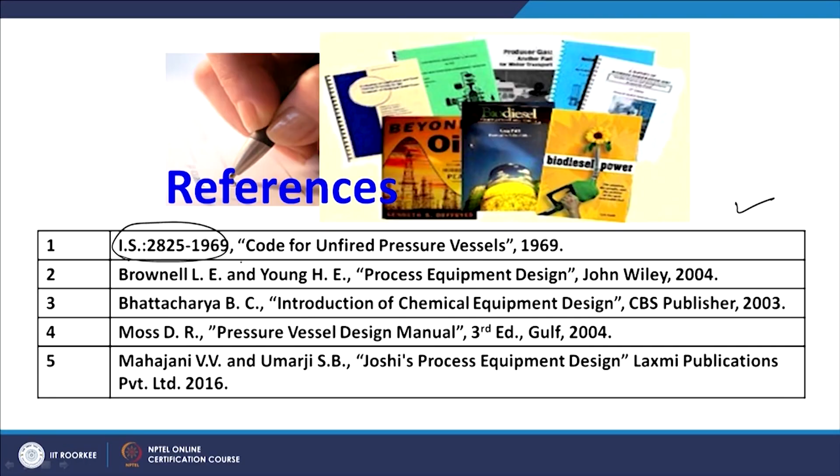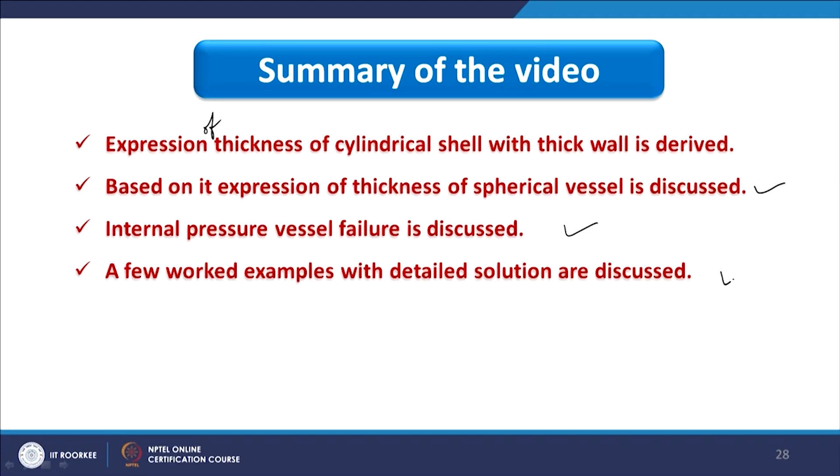Now, we have the summary of this video: expression of thickness of cylindrical shell with thick wall is derived. Based on it, expression of thickness of spherical vessel is discussed, and internal pressure vessel failure is discussed. A few examples with detailed solution are discussed, and that is all for now. Thank you.